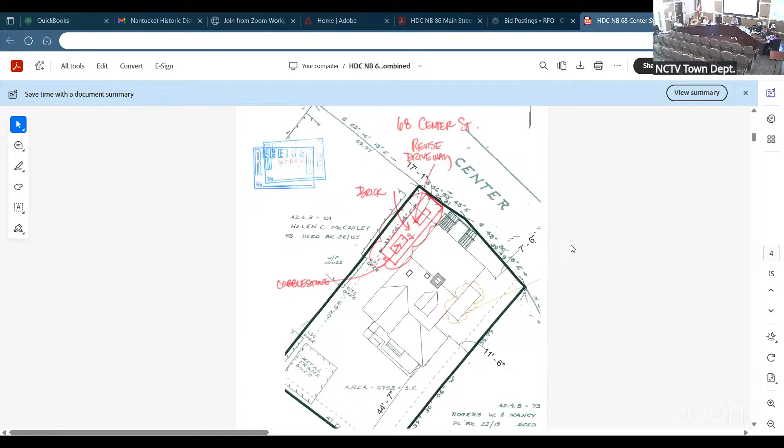Tori, I don't want to do a full-fledged presentation at this point, it was on consent. The concerns seem to be limited to which images are appropriate or not. So if we go to the images, Angus, I think we'd start with you, just indicate appropriate or not, and then we can X out the ones on the screen that are inappropriate and go from there with the other members, okay?

So the photographic images is what you were referring to, right, Stephen? Yeah. Angus, appropriate or inappropriate? So that one's cobblestone, so I think—Tori, hold on, go ahead Angus. Is this the site that is wanting to change? Yes, correct. Okay, thank you.

And so 57 Center Street, I think, is the one that you're shooting for, and that looks appropriate. It has a bay window to the right side of it. Ooh, yeah, that one, I think that's what you're going for. Yes, and this is 57, and then 53 is the other photo I was just looking at, which is also across the street.

Okay, so given that, Angus, does anyone have a concern or issue with this particular one? No? Okay, so we're just striking the other photographs. Yeah, and it'll be the same board that's voted so far, for the purpose of simplicity. And if we could get a motion, this is what address, 57? This one is 57 in particular that's on the screen right now.

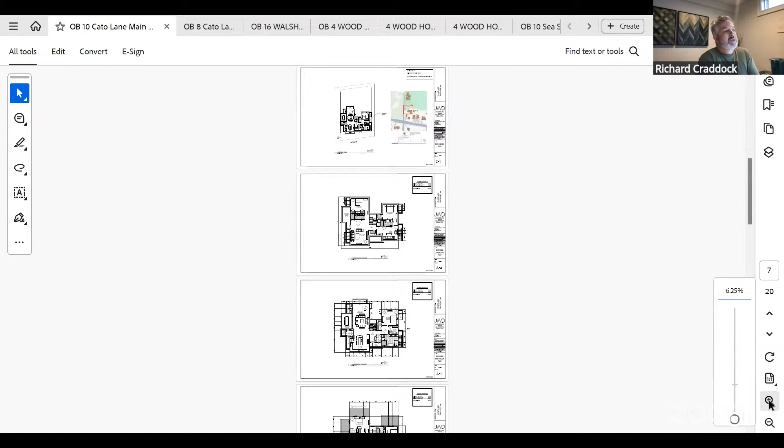Okay, Rich, can you walk us through this complicated topic in a non-complicated way? Sure. Actually, I'm going to have Jerry take the lead on this, he's the architect. So we'll start with number 10, we'll kind of walk through what was approved, what modifications we're making, and then we'll go to number 8, which we addressed your comments from a couple weeks back. So I will let Jerry take the lead on the presentation, and we'll answer any comments and questions.

Sure. Hello, my name's Jerry Durr of JWD Design, along with Rich, for 10 Cato Lane. Can I share my screen? Yes, please. Okay.

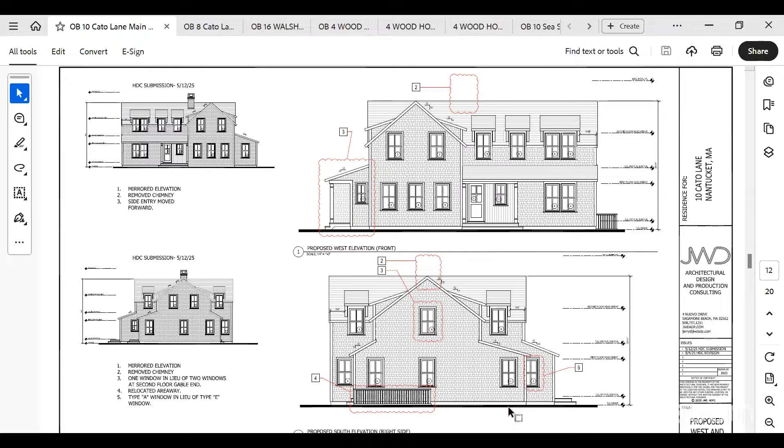Before we begin, I just want to make a note. It seemed like there was some confusion on the location of these properties at the last meeting. I just want to note on the locust map that this is on the northeast side of Vesper Lane, so it abuts the land bank to the back and the cemetery to the west. I just want to clarify the location of this. There's like 5 houses on this stretch of road.

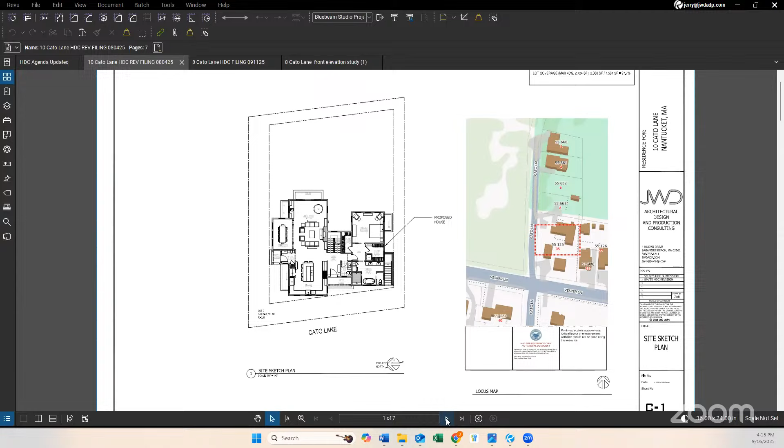Yeah, can you see my screen now? We can, go ahead. Okay. So as Rich had mentioned, this project was approved on consent previously. We're here before you, I think there's a little bit of confusion in the previous hearing on that, and I think we've since confirmed that it was approved by consent. We're coming back to you with some minor revisions to that approval, which are shown on the elevations here.

We have the proposed west elevation, which is the front elevation, and the proposed south elevation, which is the right side. On the front elevation, we're removing the originally proposed chimney, and we're essentially flipping what was the mudroom here, so the entrance to the mudroom is closer to the front of the house versus the back of the house. This is that previous image there of that mudroom slash dining room.

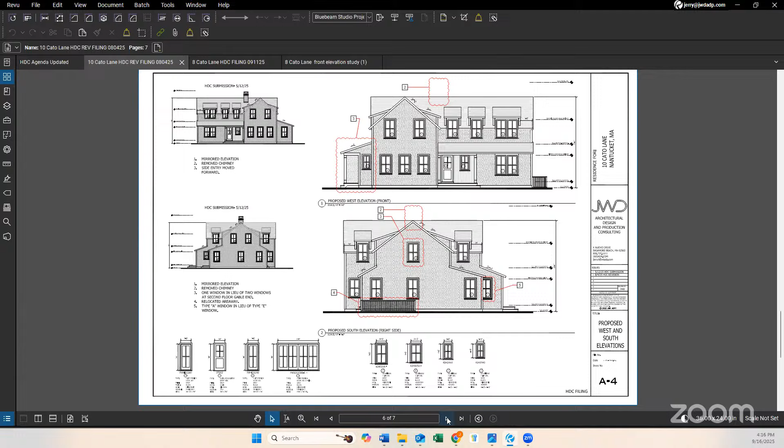On the right-hand side, we had 2 windows on the second floor, and we just wanted to reduce that to 1 window. Again, this is the chimney. The rear of the house, we simplified what's the primary bedroom. We have 3 windows where previously we had a pair of French doors and a pair of windows. Removing the chimney, flipping the mudroom area on the right-hand side.

The rear, on the left-hand side, we've relocated the areaway. We've removed the chimney here, and we've flipped the mudroom on the other side. So those are the minor revisions that we'd like to do to the approved consent of the original design for 10 Cato Lane.

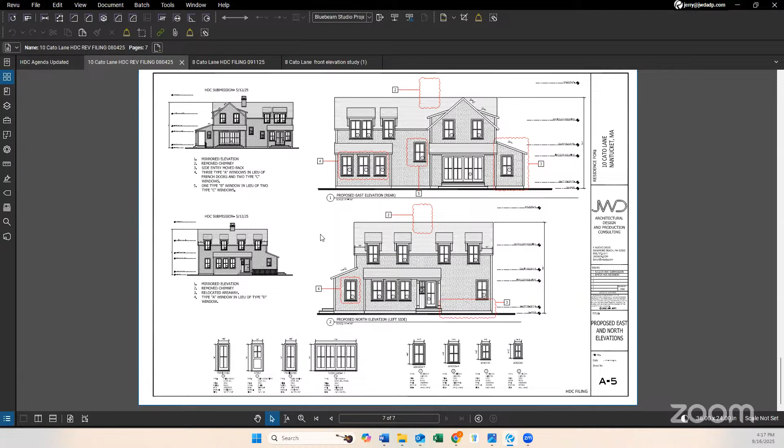So I'm happy to answer any questions. Thanks, Jerry. Okay, questions, anyone? Go ahead, Ray. Point of clarification, I guess, this house was approved on consent. Correct. Okay.

I have a question. So we had a streetscape before with 8 and 10 beside each other, so that we wouldn't have 2 buildings that look alike. And part of that was flipping gables from one end to another, so it didn't look the same.

Is there an image that you have of this revised with the adjacent building? There is. Yeah, why don't we look at that now, Jerry, as opposed to waiting for number 8?

Okay, so can you see those 2 images? Yeah. Okay, so we have 10 Cato Lane on the right-hand side and 8 Cato on the left. Okay, thank you. So that's from the Cato Lane side.

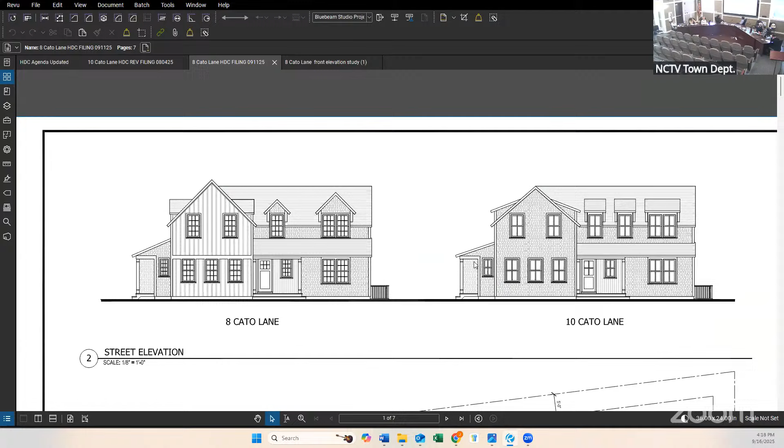Yes, and there was a question regarding this — this is Cato Lane coming down here. The property line comes down at an angle, and you can see how the homes are staggered. So 10 Cato Lane is set back from 8 Cato Lane just as a result of the property lines. Jerry, can you zoom out a little bit, please?

Sure. Okay, thank you. Okay, who'd like to begin?

Again, keep in mind, please, we're focusing on modifications to prior approval, and number 8 is the next one where we may be able to, as the authority having jurisdiction, request more significant modifications. I can start. Right.

I must have missed the discussion about this having been approved. All of my comments actually related to things that aren't bubbled. So I have no issue with the things that are bubbled. Let's put it that way.

Okay, does anyone have a concern with the bubble? I mean, they're relatively minor changes. They are. All right.

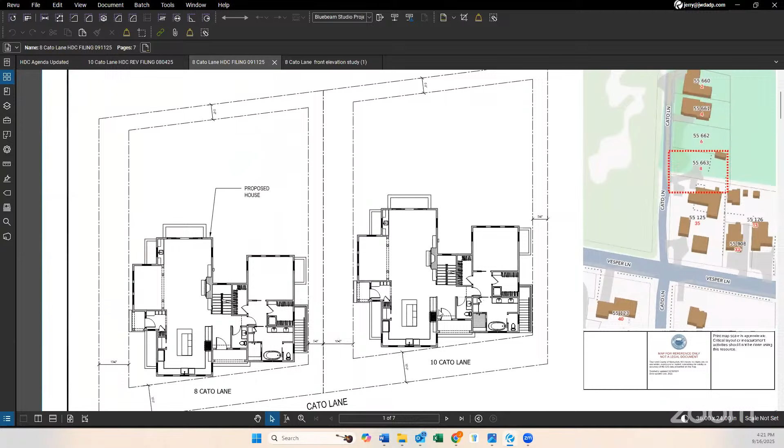Yeah, with that — so Jerry, let's see if we can pull up the landscape plan. What's unique about this particular zoning? It has some weird zoning where you have a front 10-foot setback, a rear 5-foot on one of the sides.

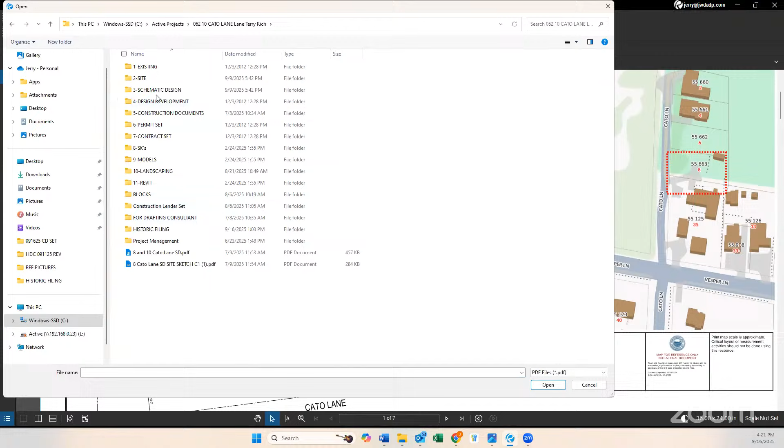It doesn't matter which one — one has to be 10 and one has to be 5. So when you're looking at this, it's not your traditional zoning. This is only one part of the island, and it's only a couple of lots, from my understanding.

Right, but if you look at this, this is the landscape plan that I put together. This is on a separate application — it has not been submitted, but this will give you a sense of the proposal. So you get the building footprint. We're going to bring the driveway, basically a tandem parking spot on the left-hand side that is within that 10-foot setback.

And then the goal for the landscape is to show a pool and a potential shed or cabana. So from this, you can get a sense of what these lots would look like and how the driveways would function. Yes, thank you.

Does this help? It does. Okay, anything else, Carrie? Not at the moment, no, thank you.

Okay, because I think we're going to be moving right along with this at this point, so if anyone has a concern, please state it now. Otherwise — I have a concern. Yes, please.

So with the intended scoop-out driveways there with the two cars right on Cato Lane, going forward - I just looked down the street 5 minutes ago, it's very rural. The other side of the street is a graveyard, it's maple trees, it's like you're in the country here, and suddenly we're going to have these little scoop-out driveways and cars. So we put this one on consent.

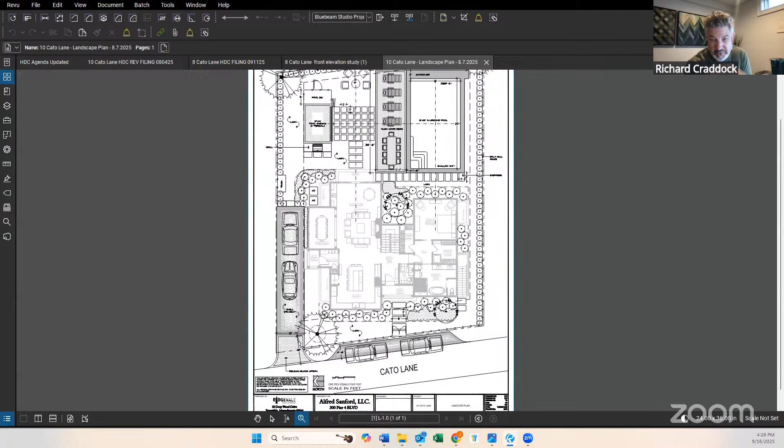So we are within keeping of the neighborhood on this section of road. Abby has voiced some concerns, and I have, and I think we're kind of where we are. So what do we want to do?

I'm going to make a motion, but I do want to preface it. I would also love to see this house move back, but I feel like it's unfair to approve something and then to unapprove it retroactively. So my motion is going to be to approve the changes that we're supposed to be reviewing right now, staying inside our lane, so to speak. My motion is to approve the changes as they have been submitted.

I'm going to second that for a brief comment. I agree with Commissioner Pohl, and I would just add that given if the hardscape comes in and the scoop outs are to be proposed, we did not previously review that topic, so we need to be able to reserve the right to modify prior approvals for changing conditions.

Just to be clear to the applicant and for the record, your motion is to approve the modifications and revisions as submitted, not including the hardscape plan. Oh, well, no, there is no hardscape. Right, just for the record.

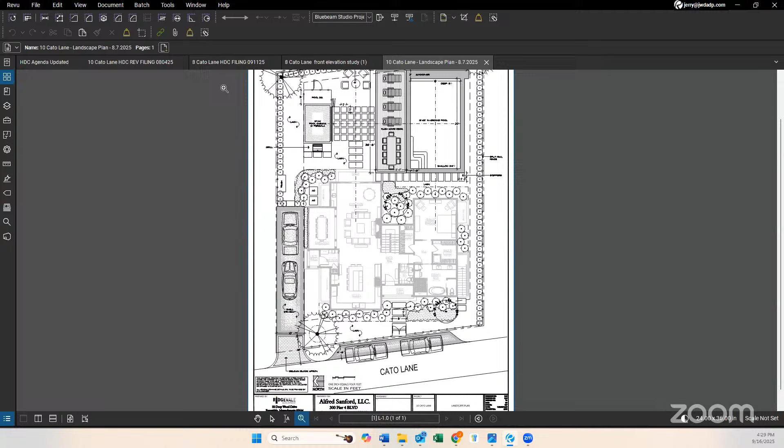Okay, let's see, on your motion, Rick, aye. Carrie, aye. Abby, I'm a no. Angus, aye. And I'm an aye. Four in favor, for the record, Abby is opposed.

Okay, now we're going to go to 8 Cato.

So this is again, Jerry Durr from JWD Design, and Rich Craddock. As we just reviewed, we have the 10 Cato on the right and 8 Cato on the left. Site plans are down below, which was one of the requests that you had asked for in reviewing 8 Cato Lane.

If we jump to the elevations, we responded to all of your comments, a majority of the comments. You can see the previous submission on the left-hand side, the revisions on the right-hand side.

We understand the concern of the similar homes from the commission. And so what we've done is changed the second floor dormers to gable dormers, which helps to have a different appearance from one house to the other. But in any case, we have gable dormers.

We've taken the primary ridge on the front of the building and increased the slope, which gives us a sense of hierarchy. It also relieves the tension from the windows on the second floor being too close to the rake.

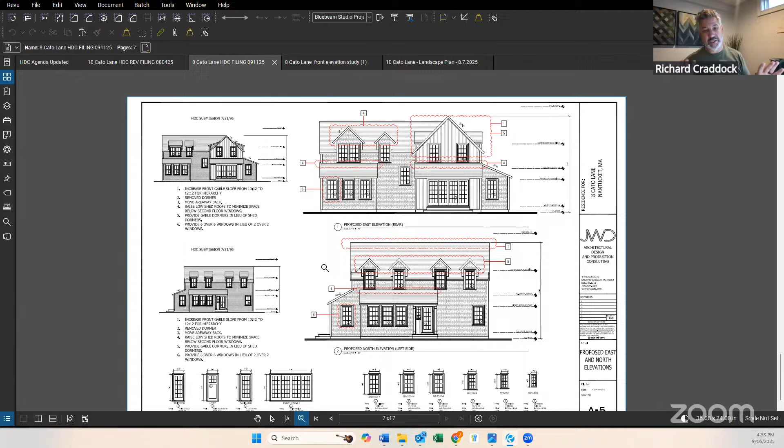And I just want to make one comment. So we did change the trim color to natural to weather, and the windows, the ones on number 10 are approved as black. Number 8 Cato Lane, the ones that were black, we changed these to Quaker gray sashes. So just so you know, there is other hierarchy besides just the design elements.

Thanks, Rich. Okay, guys, same board concerns please. I can start, Ray. Okay, so I do appreciate a few of the gestures to differentiate this from its twin next door. The 6/6 I appreciate. The gray trim I also appreciate. I'm still very much not in favor of the vertical board, particularly on the entire gable. I was reluctant on number 10 to approve it just around the door.

But I think that the switch to gables is definitely a step in the wrong direction, because those have an element of formality about them that sheds don't. My critique last time was that there were too many dormers, and it's very rare that you'll ever hear me say that. But there are ten dormers on this relatively small house. I'd like to see sheds instead, because they're more rural in character, and fewer of them, combined somehow so that there aren't so many perforations that they look like dentils up on the roof. And this one I'd like to see pushed back from the 10 feet, now that we got a bite at that apple. That's it, thank you.

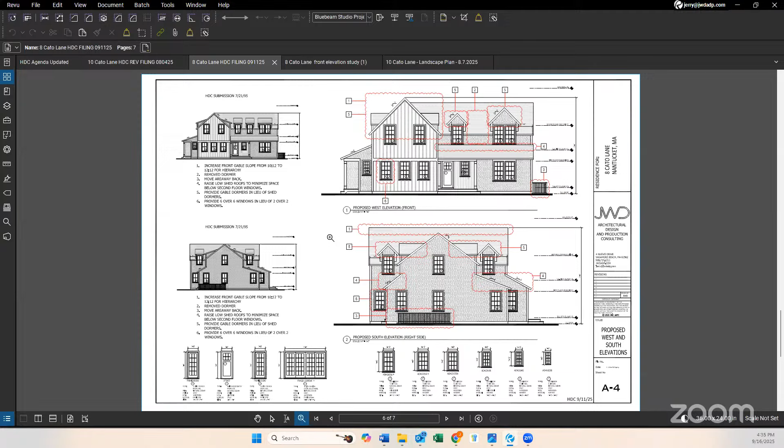I'm actually a little bit different. I agree with the comments Commissioner Pohl made. However, I believe the prior roof, the ridge height of the main mass, was more appropriate. This actually makes the structure look taller. With respect to the gable dormers, I won't address that concern since we have a consensus on sheds. I would like to see the shorter roof, the lower roof planes of the main masses, the primary and secondary mass. I'd also like to see clip gables introduced. There needs to be something to start bringing the perception of the structure down lower. I think between the combination of clip gables, shed roofs, sheds versus gables, and pulling this back another 5 feet, it will actually have a perceptible difference as you walk by. So those are my thoughts.

So you're in favor of the shed dormers rather than gables? Shed dormers, the prior massing, and clipped gables on anything that's a gable. It's reminiscent of Quidnet, and we see it in different areas around the island, and it's very successful. It's also just a traditional form. Not to sell it, but...

Well, the long and short of this is, I think the motion would be for revisions, correct? Correct. Okay, so that is my motion. All right, on your motion. Aye. Carrie, aye. Angus, aye. Abby, aye. And I'm an aye. Okay, we're on to 16 Wall Street. Let's see, it is myself, Ray, Abby, Angus, and Joe.

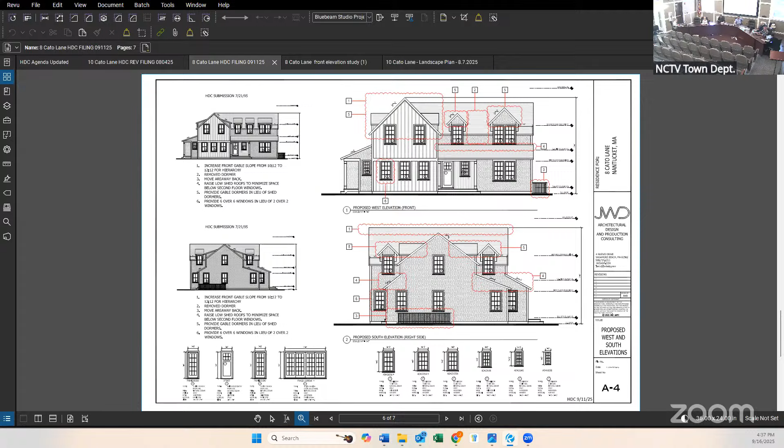Joe, can you hear us? I hear you loud and clear, yes. Awesome, thanks, just checking in. Hi, Robbie. Good afternoon. Hello?

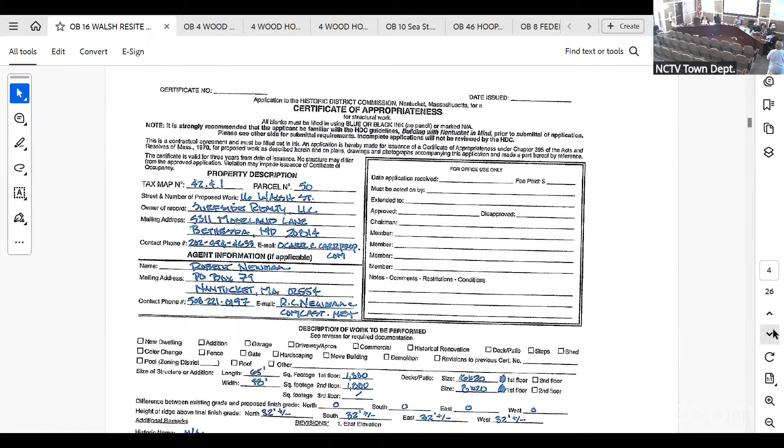I think if we just went to sheet number 1, please Fiona, we could look at the site plan. Mr. Carr might be joining us on Zoom, so I don't know if he's made it or if he wants to comment on anything. However, I think he was intending to try to log in. So anyway, I believe I have addressed all the concerns except for rotating the structure 90 degrees on the site, because it just kind of pretty much won't fit. So we can see that is evident on the site plan.

Stephen suggested that we reduce the footprint by up to 100 square feet. I think I took off in deck closer to 200. I took off on the front porch, I believe, somewhere around 50 -- it's in my notes here, around 60 on the front porch. And in the back, somewhere around 150. So a substantial reduction in the footprint, because everyone thought it was getting a little too squeezed on the site. Joe suggested, and Stephen also suggested, that the bump out we had on the left-hand side on Walsh Street be pulled back a little bit. And Joe's suggestion, which was very much appreciated, allowed me to connect those eaves all the way across to the side porch on the east elevation, which really ties that side piece together.

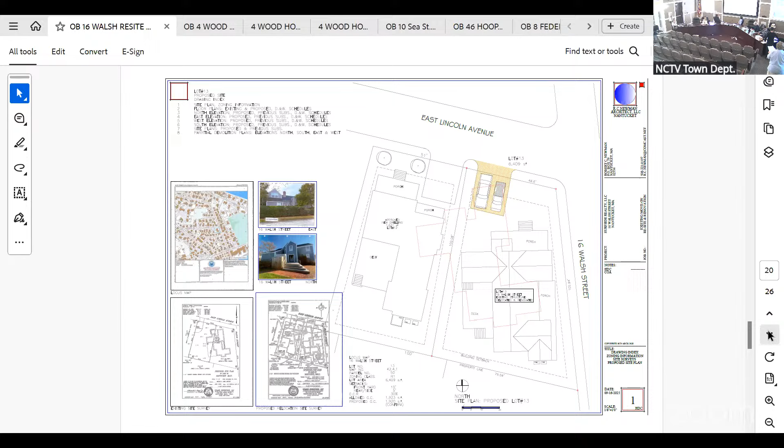So perhaps if we could scroll to sheet number 4, it shows the east elevation. If everyone's there on their pads... Sheet 4, please Fiona. Yeah, there you go. So the other two proposals are the schemes below, the smaller ones. The existing is the scheme on the left, at 1/8 of an inch, and then it progresses around. So you can see that I just tied those two fascias together, reduced the size of that, and reduced the front porch a little bit, which is the form on the right, and pulled that back a little bit so it has a little bit less tightness on the setback lines.

And if you could scroll up, please, Fiona, we could see sheet number 3. Okay, so this is the Walsh Street side. Just shows a reduction in that porch. Again, reducing those two tall gables that were of concern, how we were going to soften those.

So those are the changes. I think I addressed most of the concerns that everybody had. So let's see how we are. Thank you, Rob. I appreciate the modifications and the succinct presentation.

Who'd like to begin? Questions? Anyone? Are there any abutters? No, Mr. Chair, but Mickey Rowland is here. I see Mickey. I saw him in my peripheral vision. Mickey? Thank you. This is Mickey Rowland.

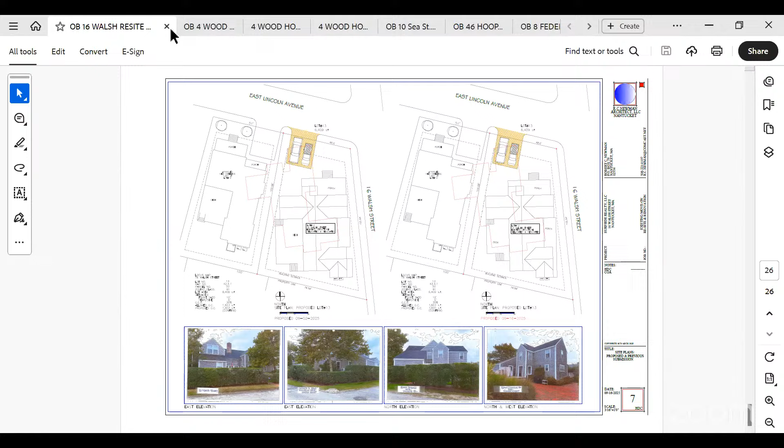Those revisions, the specific revision. Joe, I know you're not here, but I'm following along and I support the revised motion. On the motion: Joe, aye. Angus, aye. Ray, Abby, aye. And I'm an aye.

Mr. Chair, you want that at the beginning of the meeting next week, subject to meeting the submission deadline? Well, that was already passed, it was yesterday. I thought that was next week Thursday. Oh, that's new business, so the deadline was yesterday, subject to submission Friday by 8 AM. Can you put a site plan together between now and then? I'll get it in tomorrow. Even better. All right, we've got a motion approved.

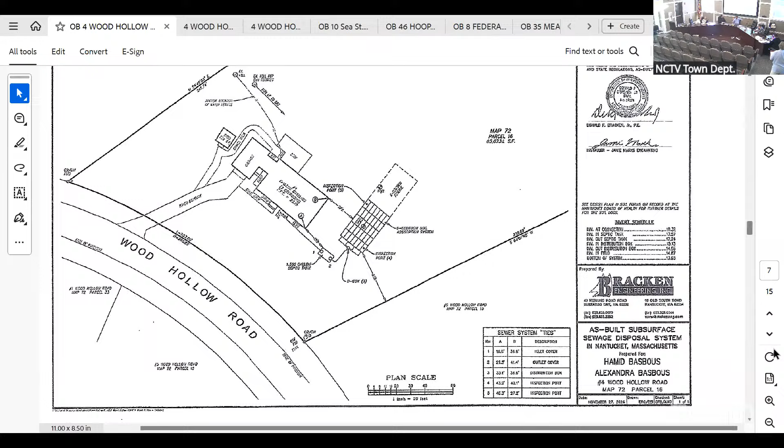Robbie? Okay, great. Fiona, could we go to sheet number 3, please? I love when they do that. Sheet number, boom, done, ready to go. Uh-oh, standing on its head.

Do you have anything else open on there? Okay, so this is the front elevation.

It's the same idea, the progression of the designs. The larger one is obviously the new proposal. We've incorporated the wraparound porch, extended it to the left-hand side, and dropped the eave line so they don't read as a continuous line. The back form is over 30 feet back, so it's not quite as massive across the front as Linda's proposing. We've reduced the size of the dormers, refenestrated a bit, and broken down the left-hand side with a one-story form. The main leading form is 28 feet, the other two drop back to 25 and 24, giving a mean ridge height of about 26 feet.

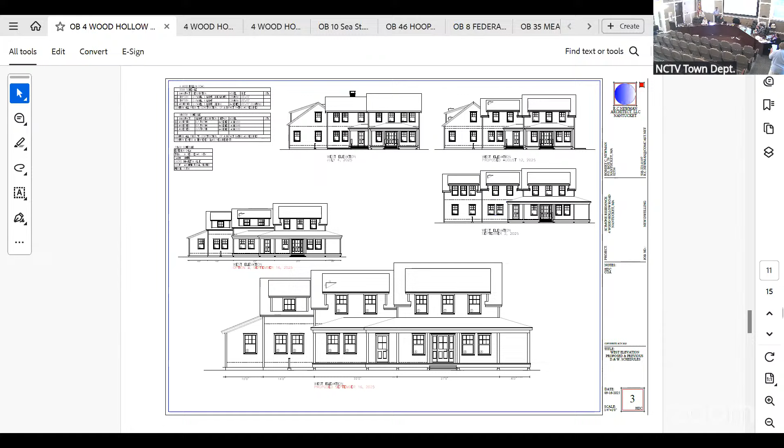Fiona, could you go to sheet number 7, please, I believe it's the last one. Here are some examples from a short walk around this property. You can clearly see there are several full 2-story houses with no dormers, all approaching 30 feet, a variety of forms, including a large garage with 2 large front doors facing the street, full 2 stories, all within short walking distance of this property. So I believe we've answered a lot of concerns, and I think we have an approvable project here.

Thank you, Robbie. Okay, same board, actually not the same board: myself, Ray, Abby, Angus, and Connie.

I can give it a go if you'd like. Please. I appreciate the changes, and it has much more of a cottage effect.

Especially with that wraparound hip porch. Just wondering if that hip on the left couldn't extend to that second mass and not bisect that last window in the second floor of that middle mass. Just bring it over a couple feet and have it go back the same way it does on the right. But I appreciate the changes and the scale and everything, so thank you.

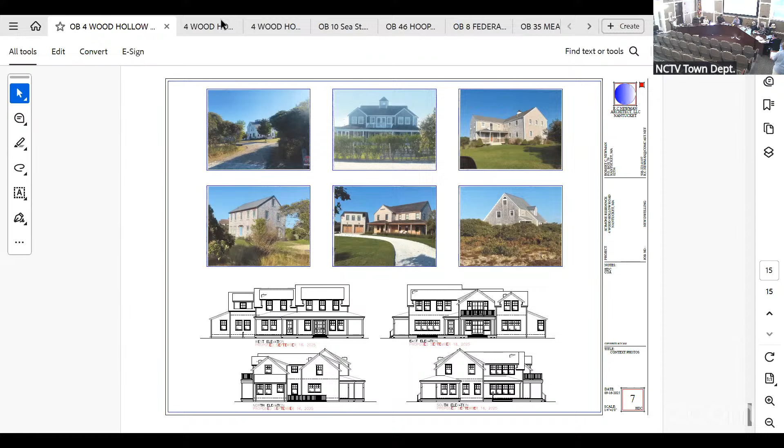Linda doesn't have any problems with the cabana. Oh, then it's gotta be okay. What else can I say? To cut to the chase, we don't have it up yet. Does Abby have any concerns? No, okay. Does anyone have any concerns? No. No. You can't see it. No, I'll trust that. Yeah.

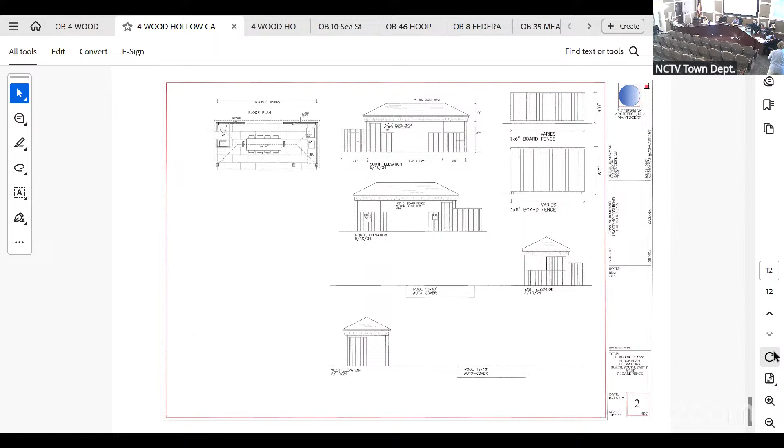Do you have a motion? Motion to approve as submitted. All in favor say aye. Aye. Opposed? Carries unanimously. Concerns with the pool, subject to a non-visible time of inspection or thereafter, and no changing grade from prior existing to the time of application.

That's my motion. Any concerns? All in favor say aye. Aye. May I ask a question before I leave?

Yeah, we did the vote. Go ahead. Okay, the approval on the house, that was with option A? That was Angus's motion, yeah. Okay, so that's the way we're approving it, which is fine. I just want to clarify. Yeah, okay. Is that an Exhibit A thing? Well, yes, it's fine, and yes to option A. Okay. Angus, will you mark up the drawings as Exhibit A?

I'll pass it. Can I just make a point of clarification? Angus, your motion was to approve option A, right? Not an exhibit A. Yeah, so there were no changes, so there doesn't need to be an Exhibit A. Am I saying that correctly? That's right. Yeah, okay, so no exhibit A. Okay, we don't draw anything up. We approved it as it was submitted. Yeah, we would just note on the application, under conditions and restrictions, that it's option A.

Oh, it's already done, it just says option A. Okay, good. Yes, sir, thank you. Everybody's happy. Yeah, that's how we work.

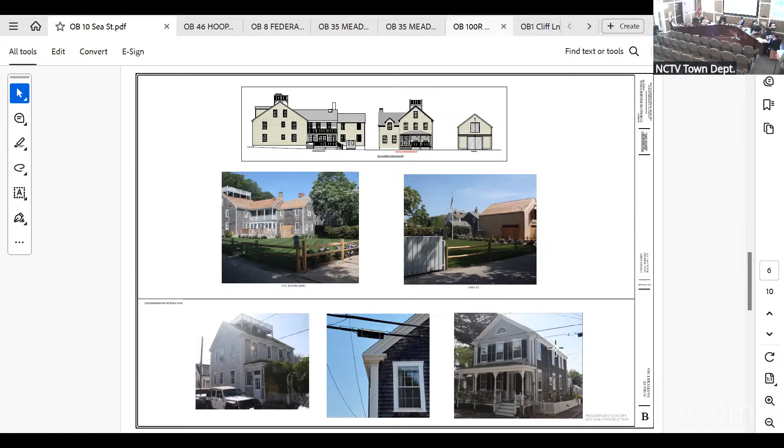So last time we met, there was feedback that the massing on the left of the main mass was too big. So we've reduced it by 2.5 feet, brought it down to a single window dormer.

Additionally, on the main mass and the side mass, the pitch was too steep from an 11 pitch, so we went down to a 10 pitch. That reduced the whole overall height of the building by about 8 inches or so, and of course the secondary mass got smaller too.

Joe made a comment that the front door didn't have enough door trim, so I've beefed up the door trim you can see, some of it being hidden by the porch, but that was modified as well.

And I was not able to track down the FEMA certificate from the surveyor yet, but I'm working on it. I understand that's required now, so I'm working on him issuing that. That has not been forgotten.

Lastly, I did not reduce the width of the roof walk as requested by Historic Structures Advisory Group. The 9-foot width, I understand everybody wants an 8-foot width, or certain members do. I don't know where that number exactly comes from. Many roof walks are over 8 feet wide, so I think this one is nicely proportioned, and I would like to still request that we keep it at the 9-foot width.

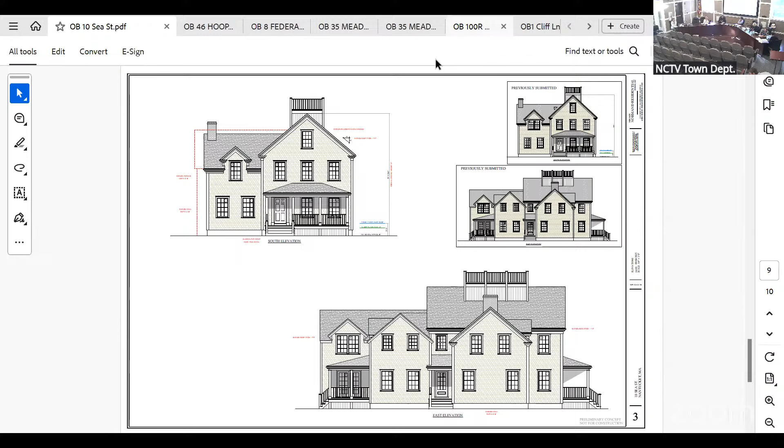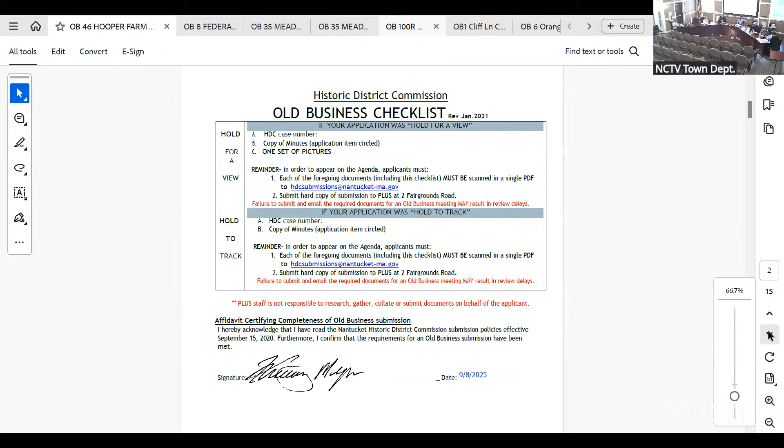Hi everyone, how are you? So this was heard a few weeks ago, and our changes reflect a lot of the board's comments. I think the general consensus was, number one, this was a 2.5-story massing, so within the neighborhood aspect it was about reducing the overall height of the structure, which we reduced by roughly almost 2.5 feet.

From the fenestration perspective, it can look a little bit of the same. We ended up more like a high post cape, dropped our eave lines, did dormers instead, extended the farmer's porch across the front, just to address the comment that there was too much exposed shingle. So that was one thing we had done.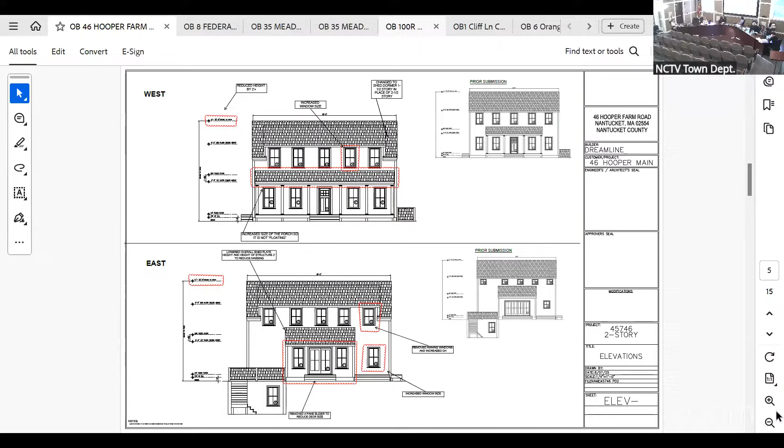And then probably the biggest change was in the rear, the horizontal aspects of the rear windows. To accomplish this, I dropped the plate height on that rear shed massing 1.5 feet to reduce that. We also got rid of the 12-foot slider that was there, and went to a 6-foot slider with just two flanking windows. By doing that, we were able to get some larger double hung windows and eliminated all the smaller awning windows on the rear of the property.

Also, by reducing that slider, we were able to just do a small landing instead of a bigger deck off the back of the structure.

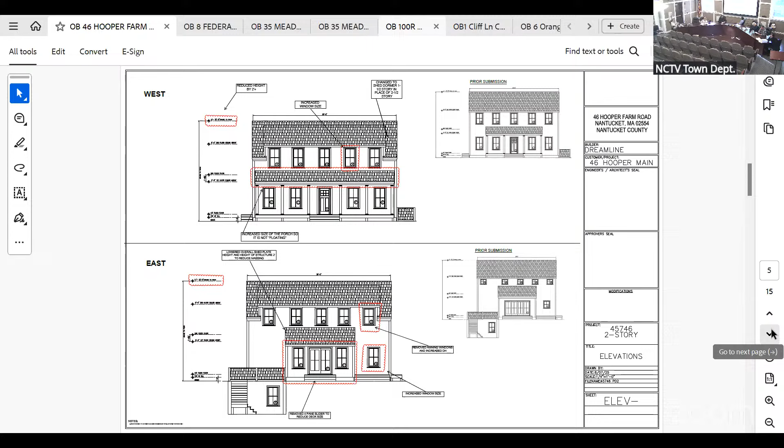If you look at the next page, the bigger change again is going to more of that high post cape feel. The other comment made was reducing the size of that shed massing off the rear. So we brought that in a foot as opposed to how we had it, and it did make a huge difference on the overall feel of it.

So we reduced the square footage of the property, reduced the height, changed the fenestration, and moved it off the rear setback a little bit as well. I don't know if there was any comment from the neighbors originally.

I personally went out there and met with a couple of the neighbors on the side, went through some of their concerns with everything, and I believe I addressed their concerns. They seem to be happy with what I did here. So I wanted to mention that there was an effort to do that as well. That's it.

Thank you. Okay, so it is myself, Ray, Abby, Angus, and Carrie.

I can start, Ray. I appreciate all these changes, it's just what I was looking for. The 1.5 story, great. Windows, great. The farmer's porch, all of it, I think is appreciated.

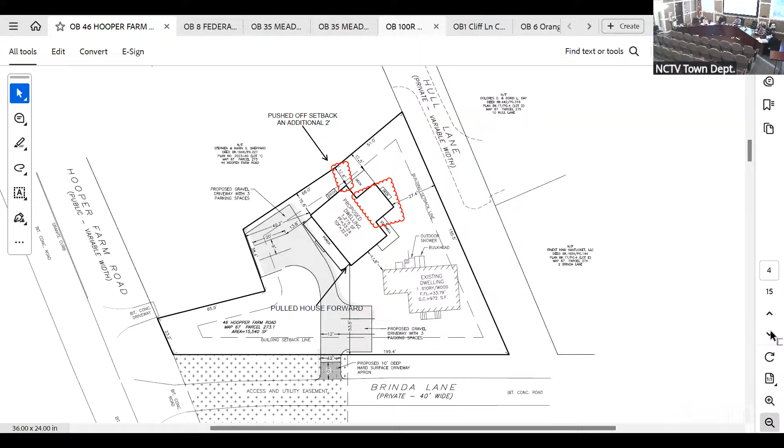What is the elevation on the Brinda side - is that south? Okay, alright, then I'll take back what I was going to say about that. I too was kind of confused about 46 Hooper Farm Road and having the driveway off Brinda. Are we looking at a landscape plan? That would come separate. There was an original driveway on Hooper Farm that's abandoned because that was a shared driveway with the neighbor - everyone agreed, and I think in about 2 months the easement goes away and we're going to use it.

Okay, nothing on the architecture then, thank you. I'm good with it, given the context of the area, including these cypress that are like windbreaks on the vast western plains - they're huge architectural elements, so this is just going to fall into the background to the extent it can even be seen. Motion?

I can move to approve this as submitted. Carrie on the motion? Aye. Ray? Aye. Abby? Aye. Angus? Aye. And I'm an aye. Okay, Chris, you got yourself an approval.

Thank you, thank you very much, everyone. Thank you for the changes, appreciate it. Yeah, of course, thank you.

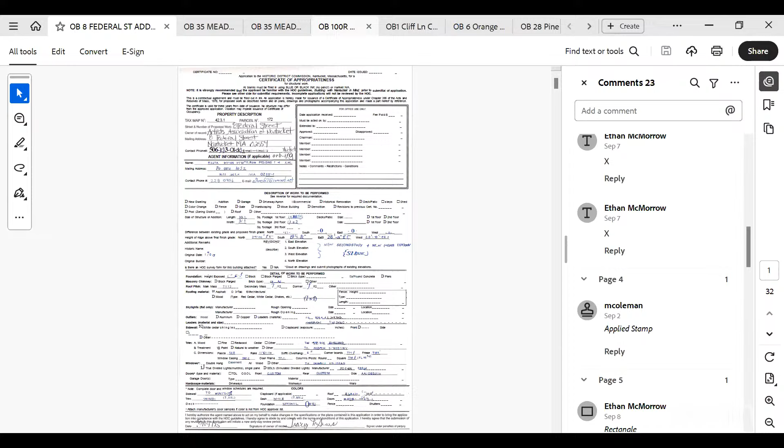You with us now? I'm here. Okay, cool. And Ethan McMorrow with - hi, I'm Ellie Foley, an architect, and I'm on the review board with the Artists Association. Good evening. Again, I'm Tracy Sears, the Executive Director. Thank you. Hey, Teresa, good evening.

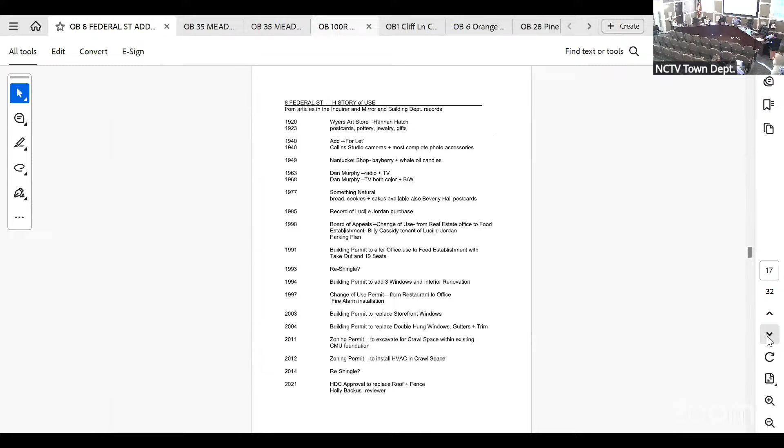Okay Ethan - yeah, so I went through and made the changes you requested. The one thing I didn't get to is the overall streetscape, I just ran out of time with all the other buildings, but I did submit a 3D model. The other thing is I tried to get existing, previously approved, and proposed all on one page. It didn't fit because I figured they should all be the same size, so the last page has the original submission.

On this one, what we did is we went through and removed the cupola, removed all that Greek ornamentation stuff, and changed the roof pitch back to match the original roof pitch, which lowered the plate height down. We took the front glass facade and reduced all the mullions that were there, beefed up the center rail so it matches the height - the picture window is the height of the door with the spacing to the transom, and the window panes on the right and left storefront windows match that.

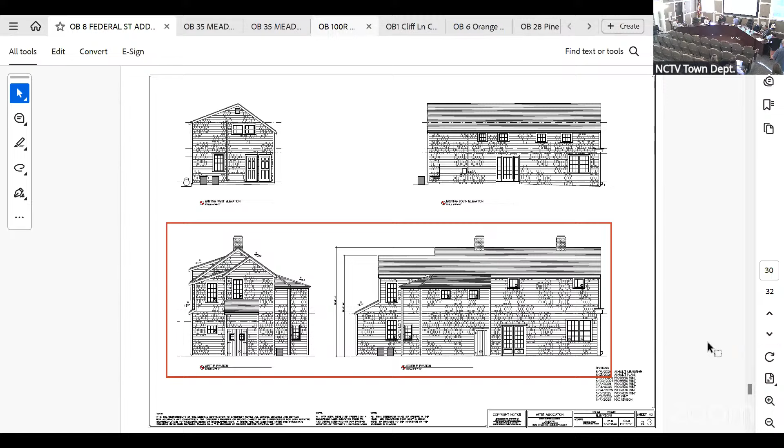The reason they wanted the open picture windows instead of ones with bars is because they can display their artwork that people walk by - right now, as you walk by the places, art is displayed in those windows. Also, the buildings similar down the street have a similar look to that, and the rear kind of looks the same. And the side - we also added, back to the front - if you go back to the front elevation, Fiona, can you move it back to the front elevation? There was a comment about the left side having a blank wall.

There's a model in there somewhere, 3D, that you asked for, a revise in the packet.

There's no abutters, Kathy? I didn't see any hands up.

So the changes that have been made are definitely an improvement. It overall feels better, the scale feels better. The concern that we still have is that the first floor has an 11-foot ceiling height, which puts the entire facade out of scale. If you look at the front door of the building, the door is practically dwarfed by the whole presentation of the front. We're hoping to knock that ceiling height down to around 9 feet, and that would bring the whole building down to a proper scale. That's really our biggest concern.

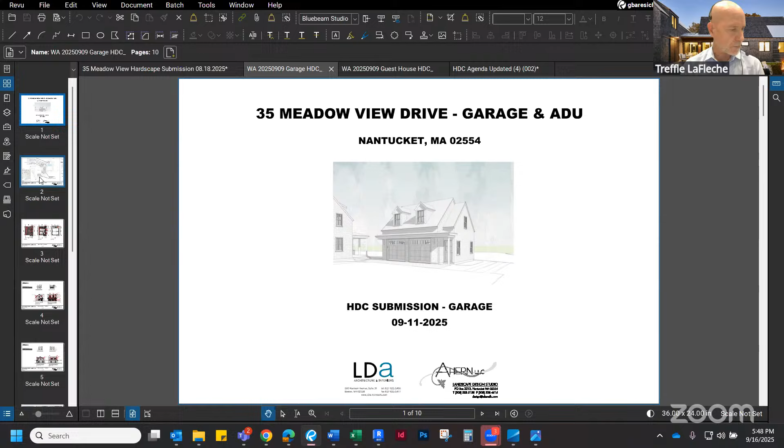Okay, so this is the garage revisions based on our meeting from 8/26. Let's go straight to the elevations, Jillian. And as Jillian is going to the elevations, I just want to mention that at our last presentation of the main house, we did make mention of the approved landscape in the backyard as well as the approved landscape submission in the front yard. And we can bring those up if you'd like while we're discussing the garage and the guest house, but just let us know.

Okay, so in terms of the garage, starting with the front elevation, we added upper lights into each of the 2 garage doors. We slightly narrowed the gables over each of the garage doors.

On the west elevation, that's the one to the left, we changed the lower windows to small double hung windows. We pulled the front gables back from the lower face of the wall a foot, and we pulled the rear shed dormer back from the face of the wall a foot as well.

Going to the rear elevation, on the right, we brought the shed dormers in from the left and the right side as you had requested. So now it is 3 feet in from the right and 4 feet in from the left, and the 4 feet just allows the shed to align with the major gable, as compared to the lower gable at the front.

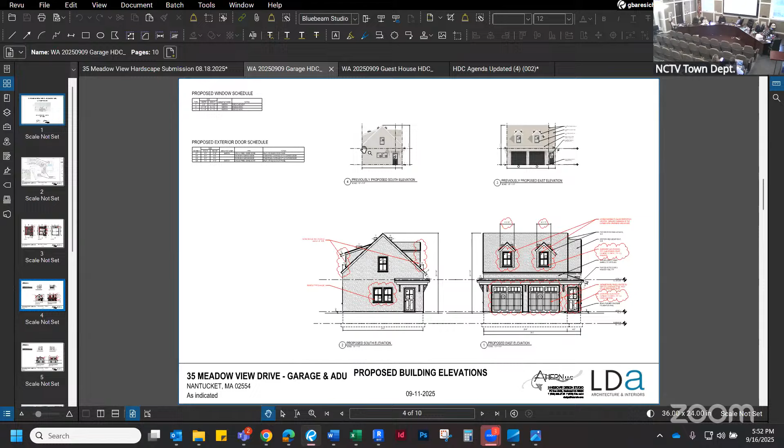Can we zoom back in a little bit so Joe can, now that he's got this information, digest it? Sure. So Joe, the feedback that we got at the last meeting was, Trev, I'm sorry. Yes, I'm gonna hold you there. Joe's an accomplished architect and all that. We can see it, and if you go to the next page, that would be great. Okay.

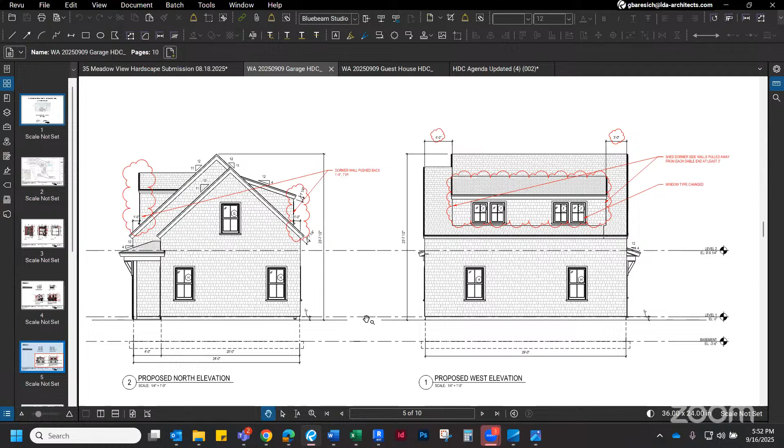Yeah, I don't have any concerns. I was confused by the stuff online, and then here on the screen it was still the old one, so I have no concerns. Okay, thank you, appreciate it, and for helping us suss that out with some real-time feedback.

Connie? Yeah, I appreciate the changes, I have no concerns. Great. Angus? I agree. Abby? Yeah, I'm fine with it. Yeah, I think it's great, looks good.

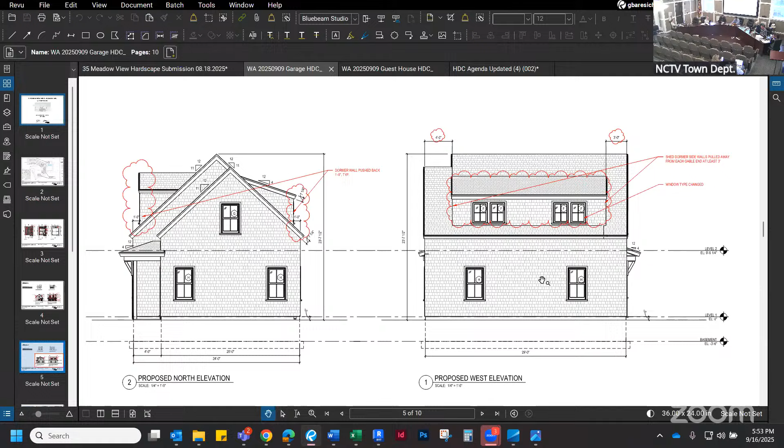Thank you very much. Okay, so let's go to the elevations on the guest house.

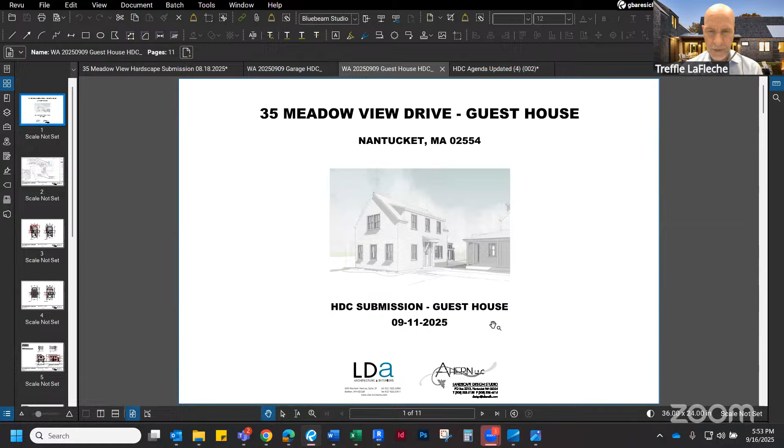Before we start, Trev, I just want to check in with Joe. Are you seeing a gable form with 3 windows on the first floor and 2 on the second, on the left? Yep. Okay, just making sure. Thanks, Trev, go ahead, please.

So the feedback that we got on the guest house is first on the elevation on the right, that's the entry elevation, that the shed dormer needed to be brought down slightly so that the distance between the top of the window head trim and the eave trim of the shed dormer was less. So we've done that, we've reduced that.

The other concern that was raised were the windows, the size of the windows at the lower level on this entry elevation. So we changed the size of those windows, increasing their height slightly, and we went from a single window on the right to two windows by flipping the program inside the guest house, and that gives us a slightly more attractive and elegant front entry facade.

The other comment was that the front entry was a little too restrained and not interesting enough. So we lifted the shed roof over it. We added some pilasters and a little transom window above the entry door.

The final comment on this elevation was the large plate glass windows at the rear. So we swapped those out with a 2/2 muntin language, and we eliminated the horizontal railing by introducing more of a shingled wall with a top rail detail.

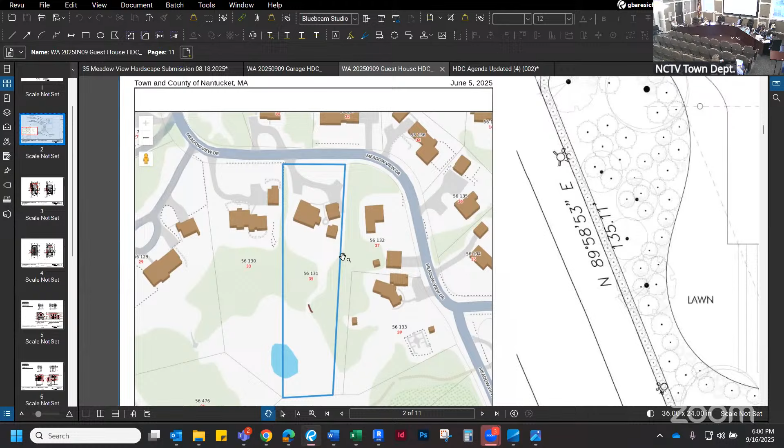It's just an odd element. I think it would definitely help to get rid of the peak of the gable, whether it's a hip. The massing typically would step down as you go back, and for this to be up higher with the dormer running into it—that's usually something we try to avoid. I'd like to see some sort of revision to that.

Okay, thanks Angus. Connie? I don't really have much to add. I'd be in favor of maybe some larger windows on the front to reduce some of that shingle space, but other than that, I appreciate the changes.

I'm with Joe on the axe the pilasters, lower the top, bury that window header or the dormer into the top plate to remove the shingle space up there, lowering the roof system. Given the location of this structure and what's there and what's going to be there, I'm okay with the rest. Did I mention the fenestration Connie just brought up? I wanted to say that. So those are my thoughts.

It sounds like we're looking for a few revisions. Yeah, minor ones.

Is this something we can exhibit A, guys? I can't do it, but somebody smarter could. I don't mind drawing it.

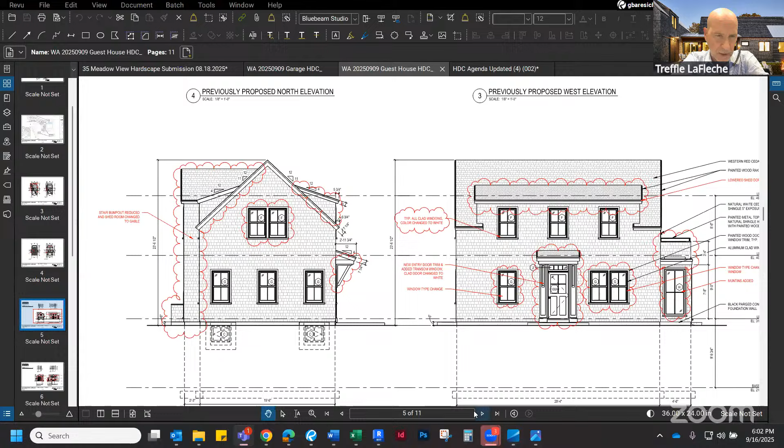We certainly can accommodate all these requests: lowering the shed dormer, reducing the shingle above the windows, making the windows a little larger, bringing their meeting rail down to align with the eave. If I follow Angus's comment about the stair, dropping the eave of the gable so that it is lower than the intersection with the shed eave.

Yeah, I think we're probably at the point where there's enough there to do revisions. I'd make a motion to hold for revisions. On your motion? Aye. Joe? Aye. Connie? Aye. Abby? Aye. And I'm an aye.

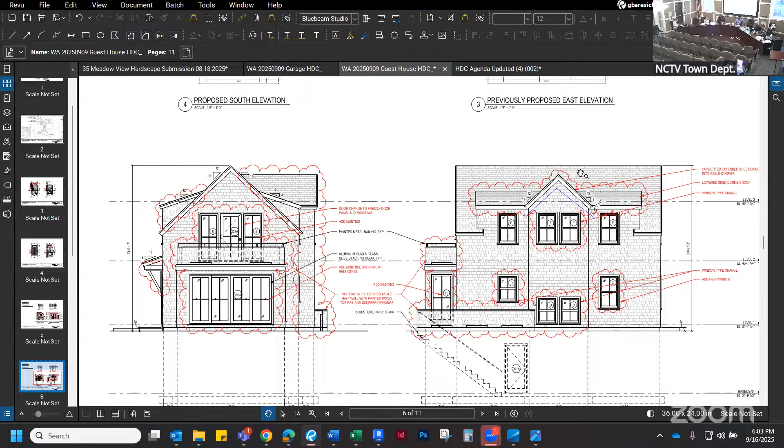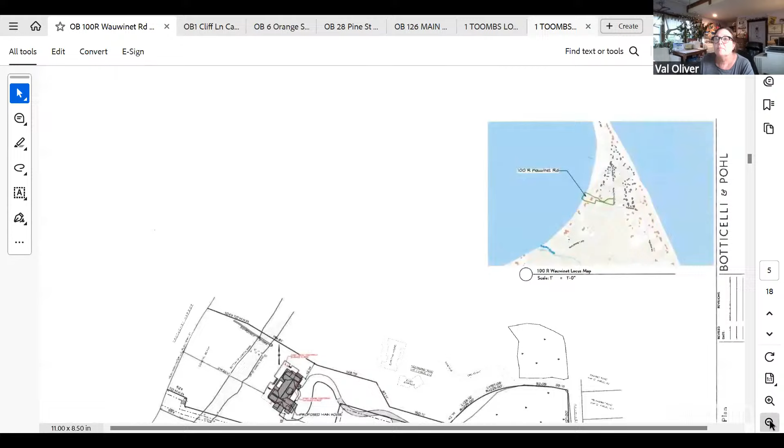Val, you with us? Yep. Okay. And Carrie? Yep. Did anyone not view this? I viewed it last week. You didn't view it? You can't see it, so that's the truth. I got a rowboat and went out there. Did you take—no, we don't have a boat. I think it looks so similar to what's there, only improved and better. I thought it was perfect the last time.

Okay, we're just jumping right in. Abby, your comment, do you agree? Yeah, I think the paints really help. I mean, it's already a pretty nice looking building, but I think the paints help, add a little bit of elegance.

Can I—Carrie, present my—no, me too, I'm good. We look at the drawings and make a determination, not listen to the words. Carrie? I'm good. Angus? Yeah, I mean, it's an improvement on what's there.

Motion to approve is submitted. Val, on your motion? Aye. Angus, aye. Carrie, aye. Abby, aye, and I agree with the other comments, and I'm an aye.

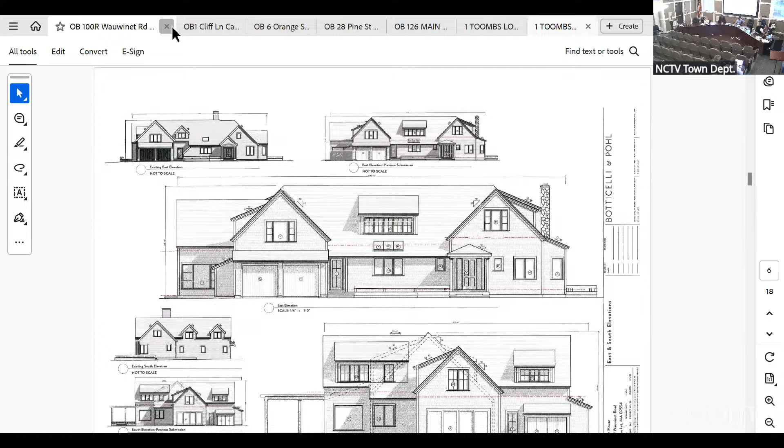Okay, thank you, now we're—by the way, we added buttons. One Cliff, Juraj? I saw here that—I'm promoting him to panel. We saw it. Promotion to panelist.

Go ahead, walk us through this little cabana. Okay, so...

This is from a while ago. Actually, I applied for this cabana, which was—Juraj? Are you sharing your screen? Because we don't see anything but you. I'm not.

No, you're still there. I'm going to share it. No? See—is there something going on there? Yeah, I just need to turn it on, just need a second. Turn on your sharing, right here. Got to be ready to roll. This is the people's time.

All right. Okay. All right. So,

This is the application from a while ago, the proposed cabana, which when last submitted was kind of vertical, and maybe you didn't like how tall it was and skinny, and you didn't like the roof pitch.

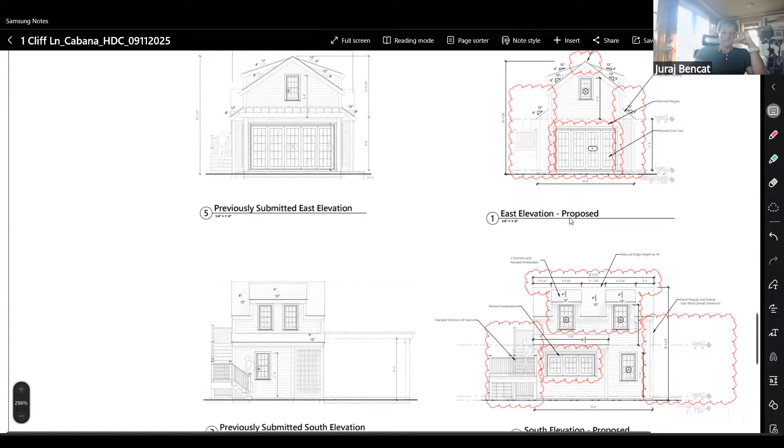So I did some changes to the overall shape of the building, where the most visible would be the south elevation. This one is what was previously submitted, and I changed it to be longer and skinnier, which actually lowers the ridge height and makes it look not as tall and skinny. I also made changes to the fenestrations, dormers, and the stairs going to the second floor.

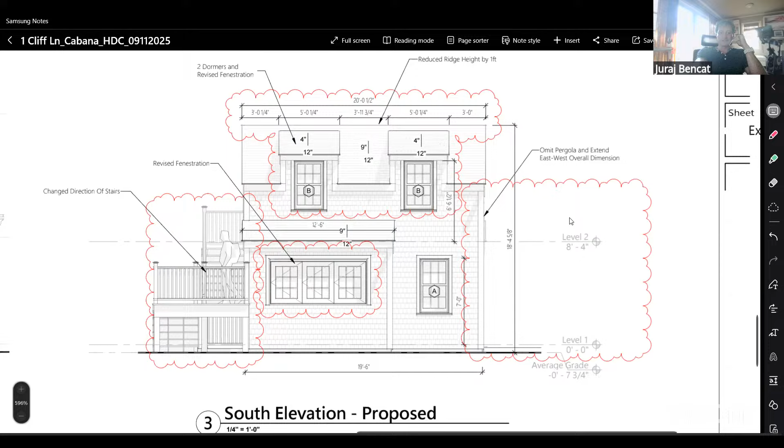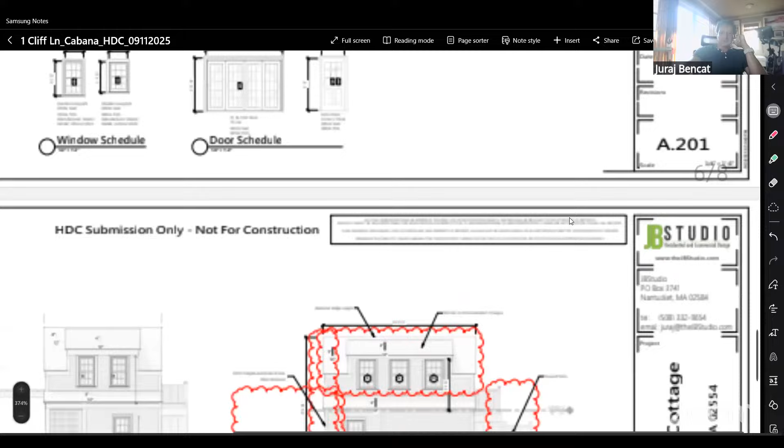From the pool side, where the pergola was, I made it narrower so it doesn't get as tall, and I removed the pergola. On the other side, from the north, the same thing, which is all the way in the back. And this here is from the west, where I changed the orientation of the stairs going to the second floor.

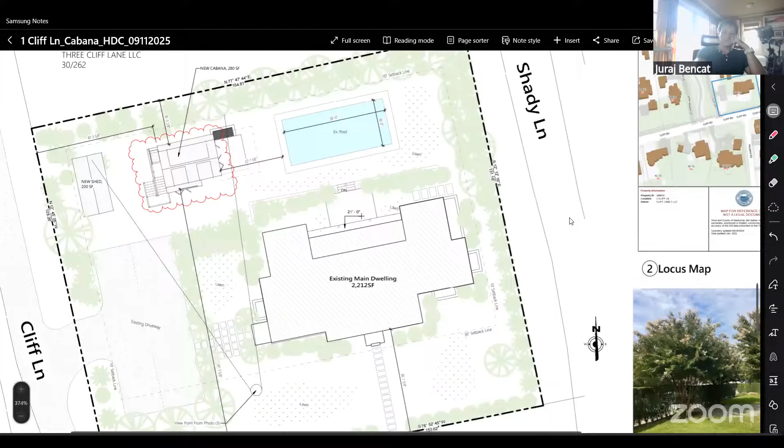Okay, and then just quickly, if you go back to the site plan for a second. Can you zoom out a little bit? A little bit more.

Okay, great, thank you. All right, One Cliff Lane, we've seen Holly's comments. Who would like to begin? I will.

Al, thank you. I feel like you really listened to what we had to say. The proportions in your first rendition were almost opposite of what they should be, and now it's more traditional. The only thing I couldn't remember is what the main house looks like, and that was a concern for us, to make sure they balance one another. But I went up there and this is far enough back. I think everything about it is fine, so I'm good with it.

Yeah. Ray? Can you pass me for now? Yep. Angus?

I agree the proportions are so much better. It doesn't feel nearly as vertical. My only concern is really the thing we try to avoid the most, which is exterior stairs, and I feel like it's front and center in relation to the street and the driveway. I would much rather they be on the east instead of the west, or have a bend more on the north side than the south side. That's really my only concern. Otherwise, I think it's come a long way.

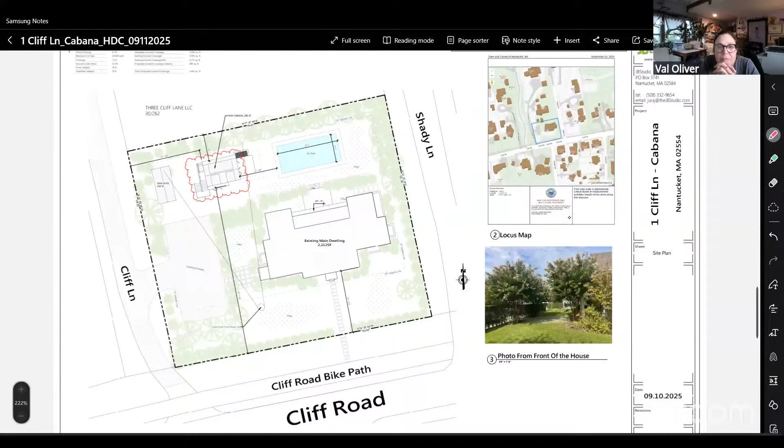Isn't it possible to do them here? I don't know what you mean, sorry. Could you say that differently? I sketched it on the screen, like putting the stairs here, going up like this. So he's just saying flip-flop them so they are further away from the driveway. I'm not suggesting that's what we're suggesting, I'm suggesting that's what he's suggesting. You're right, I think we just need to get a revision.

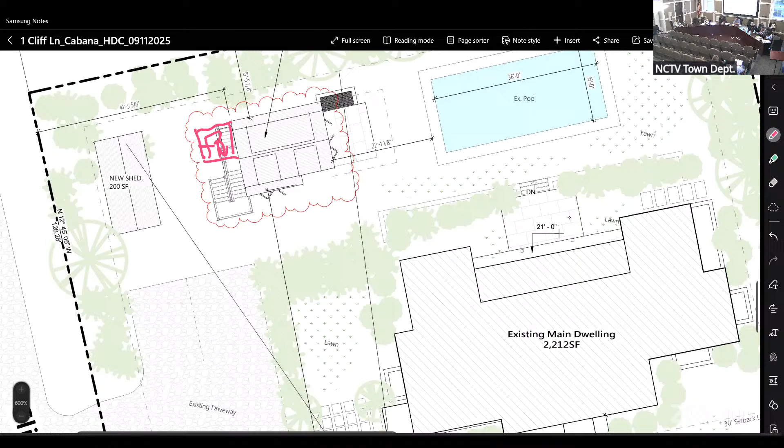Well, the discussion here at the table is more about straightening the stair and turning it. Is that what I'm hearing? Yes, at least from me. And Val, your comment about the stair was it could go from the north and go up and turn the corner to the gable to mitigate the double stair portion of it. Okay, if you are okay with Exhibit A going like this. Angus, what was your concern?

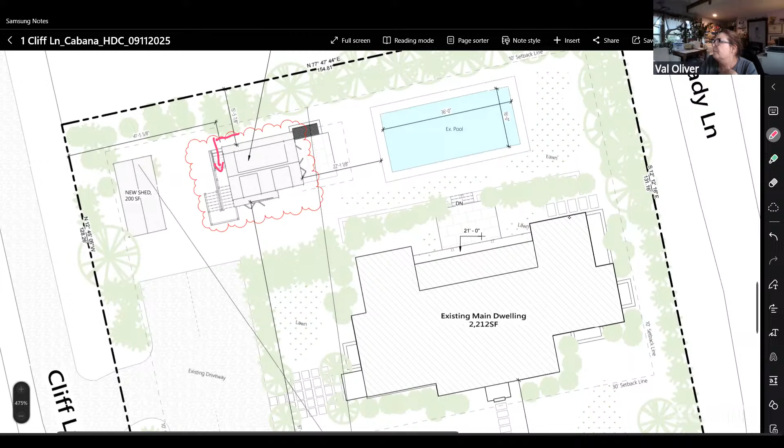So, Val, your motion is Exhibit A, modifying the stair to start and end as shown on the screen. And Angus has volunteered to do an Exhibit A. Thank you, Angus. Okay, drafted, that's my motion. On your motion: Aye. Connie, aye. Angus, aye. Ray, I'm going to abstain. And me, I'm an aye.

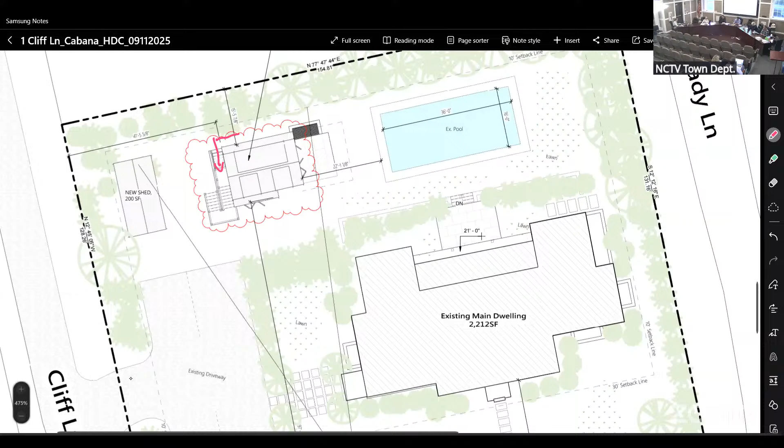Now we are on to... I colored over it. Stephen, what address is this? 6 Orange. Oh, I just covered over a green space. There's nothing there.

St. Mary's Church hardscape. 1, 2, 3, 4 folks - there's 4 to go after this. We appreciate all your diligent work, the whole community does. When you see it, the floor is yours, Stephen.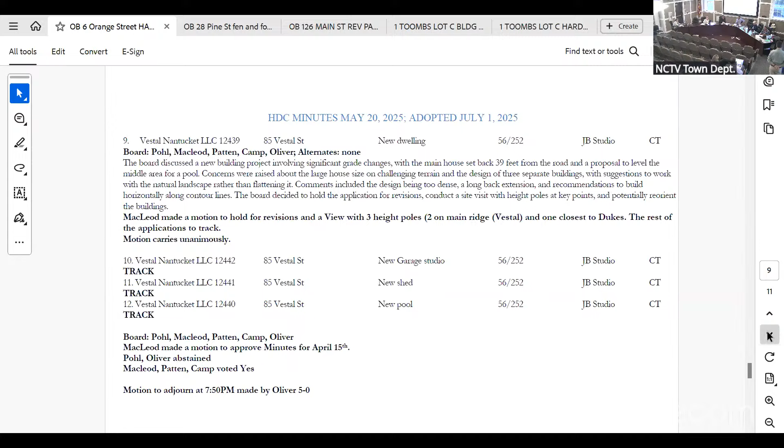Thanks. Steve Hollister, representing St. Mary's Church. We're talking about the rectory at 6 Orange Street. We've implemented a number of the commission's requests. For the retaining walls, we removed the bluestone cap. We added a narrow planting bed at the base of the lower wall where the lawn is located, to add space for a climbing vine. The intention is to make these walls go away as much as possible. The upper wall will be heavily planted so that we're screening as much of that exposed wall as is possible.

We've improved some labeling for the rearward board fence at the back of the lawn. We added a label for the flagpole. The flag is being relocated from the upper lawn, and is being put farther back on the lot and farther away from the road. In the driveway and parking area, we've reduced its size. We framed its perimeter with planting beds per commission request, and we changed the material to pea stone.

We've added a fence to the rear corner of the building to screen the bulkhead and the rear utility area, and then planted the front of the fence, creating as narrow an aperture as possible for a double gate, just to close down those view lines from Gardner Court. We've added a type 2 natural fence around all of the HVAC condensers to screen those, added some additional planting around an existing generator, and added a few stepping stones at the end of the brick pathway that leads into that rear utility area, just to tighten things up and make the generator disappear. And I think that's it.

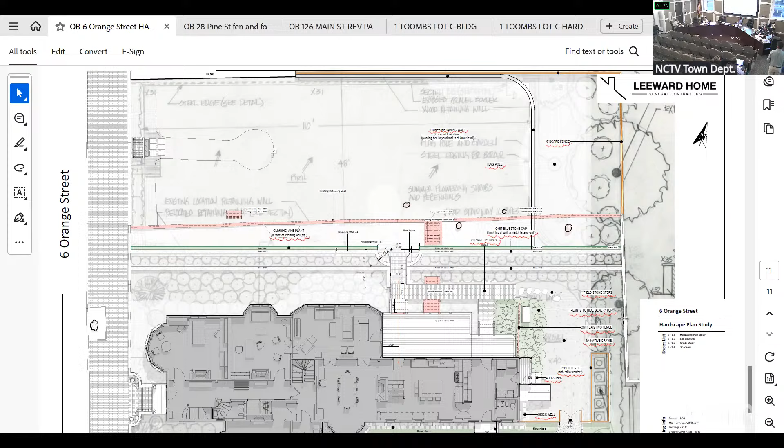Our understanding was there was kind of a general concern of having two separate retaining walls on the north side of the building. We were hoping to see it look closer to what is there now, which is just a single wall. It would probably require some sloping of the grade, which is what's happening at the moment, rather than the terracing that the two walls create. The other concern is down on the south side - there's quite a bit of parking right on Gardner Court. That doesn't exist presently, and it's more parking than you'd normally expect in a residential neighborhood starting with commercial. The other concern is that type 2 fencing around the condensers is not quite enough screening. Also, I think it would be very helpful if a cross-section was done to show how that grade on the north side of the property is really going to look. It's not shown in this application, and I think that would be helpful to see.

Thank you. All right, so it's myself, Ray, Abby, Angus, and Connie.

I can go. I'm going to take Stephen at his word when he says they're planting out the second wall and the first wall too, with the climbing vine. So I think the salient comment for me from Mickey was the condensers, which are relatively close to the stone alley, appear only to have a flower bed in front of them, other than the enclosure of the type 2 fence. Is there any way we can vegetate that a little bit more? The third point I just want to make is, yeah, there's a lot of parking, but this is a rectory, and I'm sure they need enough room to have people. I'm granting them an exception in this case - if it was a bank or something like that, I'd have a different view, but because it's a church rectory, I don't see the issue, particularly if it's pea stone as described. Those are my comments, thank you.

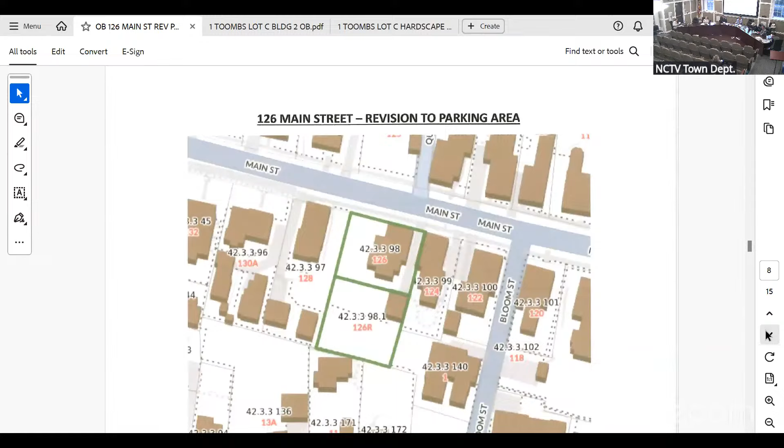So this is, I believe, 126 Main. Ray - your board is myself, Ray, Abby, Angus, and Connie. Is everybody at the table, is there an alternate? Oh, Carrie's there, Carrie's an alternate should she be required. It dropped in, you wanna go back to the first page up there?

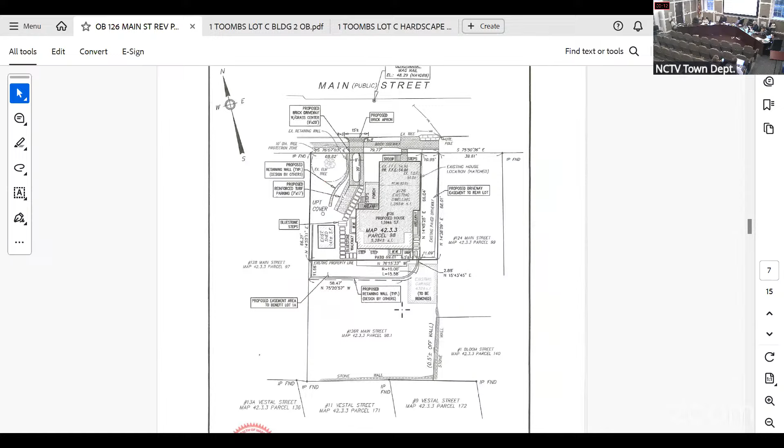So that's questionable. Do you have any other pictures to show us? No, that's the most. Okay, can we go back to the site plan, please, and zoom in? Sorry, I didn't mean to interrupt. Zoom in a little bit more, please. Yeah, way better. Okay, and he had 2 plans on the same page, and we took the other one off because that was just an existing condition.

All right, let's see - any questions for Linda? Would you guys like to begin? Can we please stay on topic? Well, we've got a timer and people are gonna...

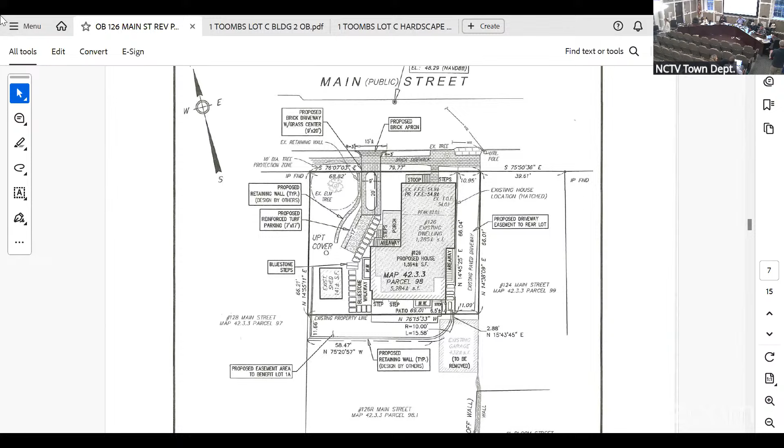Okay, people, we understand. So your board again is myself, Ray, Abby, Angus, Connie. Who'd like to begin? I'm happy to start.

Angus: I feel like Kevin eloquently stated all the reasons why we voted against this before, and I'm still against it. That's all.

Connie: I'm still not in favor of having, even if it's not going to be used, it could be used, having a car parked on the lawn. Abby: Yeah, I'm not in favor of the car parked on the lawn.

Ray: Me too. As I believe I said last time, the only way I think this works is if there's a sprinkling of cobblestone, so if the car is parked there, it looks like it makes sense, like there's something to park on.

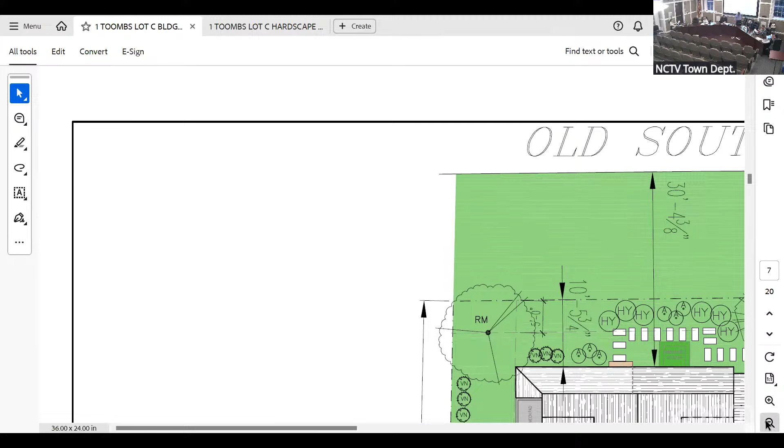So you're up again, Linda. And I'm gonna say goodnight, everyone. Yeah, good night, Stephen, thanks. Thank you all for your hard work. Let's see, who, I mean, we have a board of myself, hold on, Ray, Abby, Angus, Joe. Joe, are you still out there? I am listening, intently. All right, so we're gonna do what Stephen calls a lightning round.

Connie's on this. Okay, so we're looking at the last one of the 6 buildings for this Toombs Court, on that map above is the lower right-hand side, the one that faces building number 2. That's lot C, redesigned per your request. We revised this, included 1 story, we changed the orientation of the front door, we lowered the building, and the other ones.

Sort of changed the whole process. The reason why the hardscape is in there is because when we changed the footprint of the building, the hardscape changed, but the hardscape is all the same as the other.

So if you want to shoot it over to Dinah, is Dinah up there? She is. Okay, Dinah can actually give you more. Hello. Hi, Mr. Chair. I'm having a little hard time hearing Linda. Are we ready? Are you plugged in over there? I hope so. That doesn't get said often.

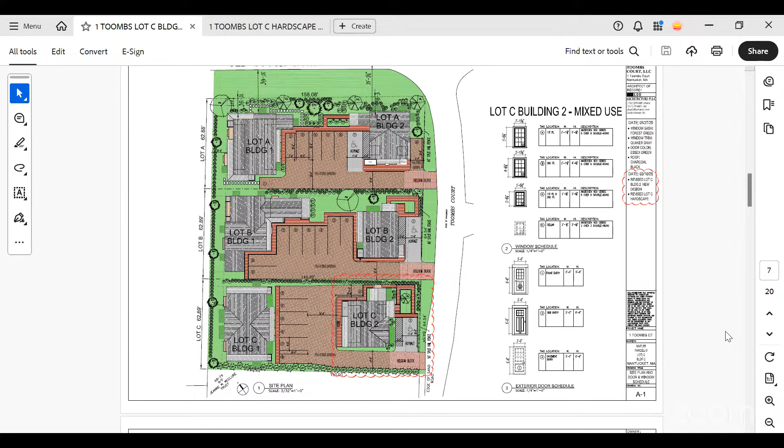I just wanted to go to the elevation. So Dinah, continue. In response to and addressing the HDC's comments from the last meeting for building number 2 on lot C, we revised the footprint to include some 1-story massing to vary the roof heights. Now we have a roof height at 13'3" and a roof height at 27 feet 7 inches. We also lowered the building by 1 foot, which was another concern. It was previously 28 feet 7 inches.

Another comment, which we agree with, is that the main commercial entry was facing the neighboring building. Now we have rotated it to face Toombs Court. This is unique to this site in that the ADA entry path now terminates in the front yard versus the side yard, like the neighboring building.

So it's different from the neighboring building for that main entry. The 1-story portion is located between lots C and B, and I think this helps to buffer the buildings more between one another. It includes a secondary commercial entrance as a side door off of Toombs Court facing north, facing the adjacent building. I think the 1-story massing also helps emphasize the staggered nature of this building along Toombs Court. We have a larger first floor footprint, which the commissioners in the past have asked for to ground the building more, so we were able to do that.

It's evident on the 3 elevations. You can't really see it from the west elevation or the south elevation. Other minor comments: we mirrored the gable portion facing Toombs Court to the other side and deleted a small bump out that was kind of an odd detail, just cleaned it up basically. We also revised per the other comment to use the larger window type A, with less shingle between the first and second floor. We did keep 1 B window on the north elevation above the side massing that's below the 13'3" massing. That's all I have.

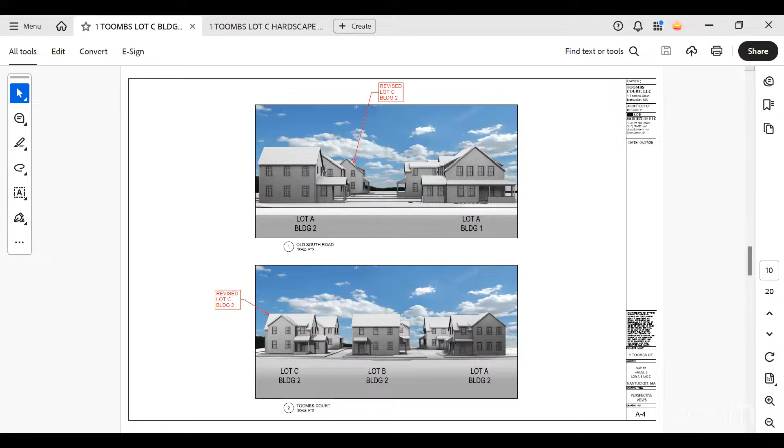Dinah, what are you suggesting? I'm suggesting if we make a shed roof for the additive massing, are they referring to the shed roof over the main entry?

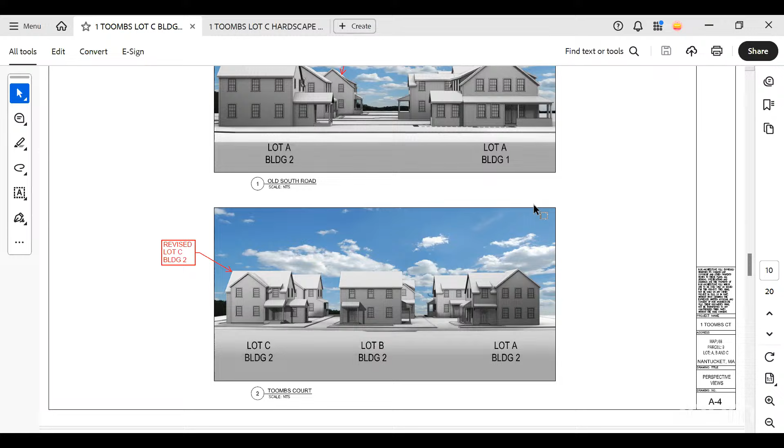No, okay, I apologize. Let me just say a few things here. Earlier on, Angus had suggested taking the single-story gable that faces north now and turning it into a shed. Joe agreed that was a good thing to do, as did Connie, as I am about to. And now Abby is suggesting that rather than have the space to the left-hand side of the gable that faces Toombs Court, to have that whole thing be a gable. Move it over to the left.

Yeah, it just looks like a fake little indent from all angles as far as making it flush with the well end. Okay, I have thoughts on that, there's a reason why it's not that. All right, well, but Abby, continue. No, that's my only thought, otherwise I don't have any.

I'm afraid, like, personally, if you look at Lot A on the same view that says revised Lot C Building 2, if you look at Lot A there's a rebate between the gable and the secondary gable that runs into it. That is very common, hopefully, a very common additive massing concept that we see on Nantucket. When a gable does a flush corner with another gable, it's sort of like the gable turns into an eave, which I find to be a sort of modern and somewhat awkward detail.

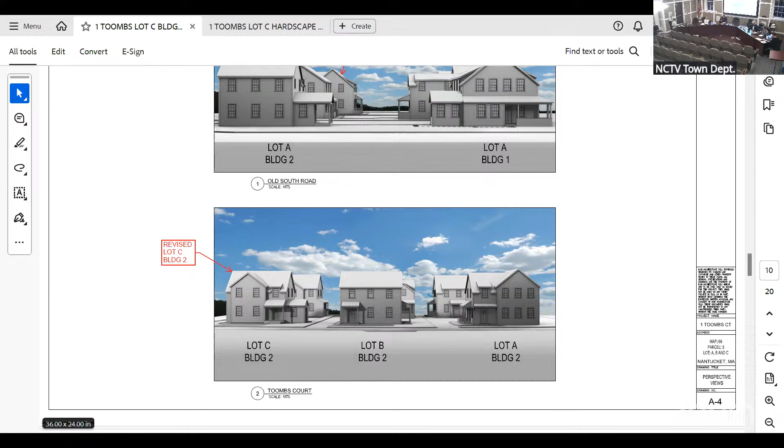Comments from the board on this one? I could go. Yeah, go ahead. I would just say I've become okay with this project, but I would say next time when we have a development like this, if we could make a little more public space for the people in these buildings and not so much driveway. But that's just a sort of global thought. That's all I have, thanks.

All right, otherwise you're okay? Yes, all right, thank you. Who's next? I have no concerns. Okay, I don't have any. All right, Joseph, need anything? No concerns. All right, we can move it.

Motion to approve as submitted? Very good, thank you, Connie. Let's see, on Connie's motion, Angus, Aye. Abby, Aye. Joe, Aye. Connie, Aye. And I'm in favor. That concludes our festivities for the evening, folks.